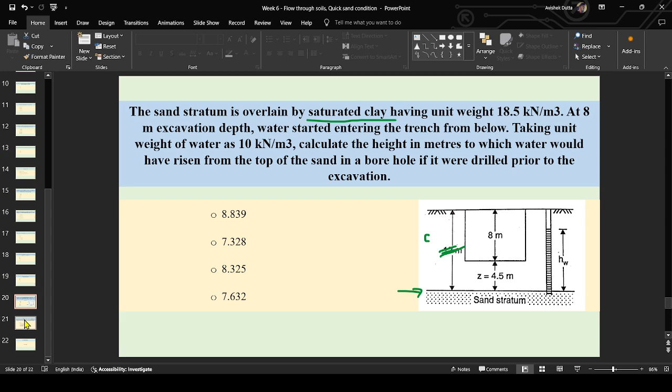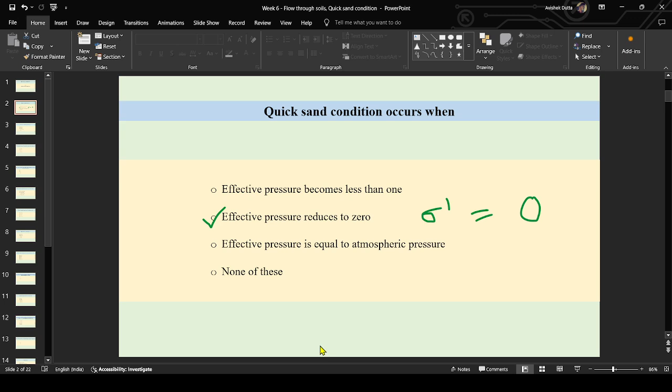Next question: soils most susceptible to piping failure are? What is the answer?

2C, yes very good, fine sands and silts. Fine sands and silts, why? Because in this kind of soil, there is a continuation of the pores through which the soil can seep upwards. What happens with clays? Clay, they are porous but not permeable, too small pores for the water to pass through.

And what happens in coarse sands and gravels? In coarse sand and gravels, because of their high grain size, there is a discontinuity in the pore spaces, and the seepage path breaks. It is not consistent, it's intermittent. But in fine sand and silts, seepage is possible because there is continuation of the pores. So fine sand and silts are more susceptible to piping failure.

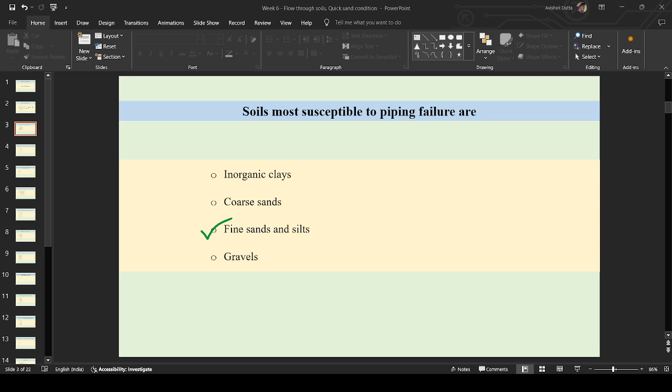Okay, the line within a dam section below which there is positive hydrostatic pressure—of course, it is an earthen dam I'm considering here. What is the answer?

What is the answer? Phreatic line. Below this, there is positive hydrostatic pressure.

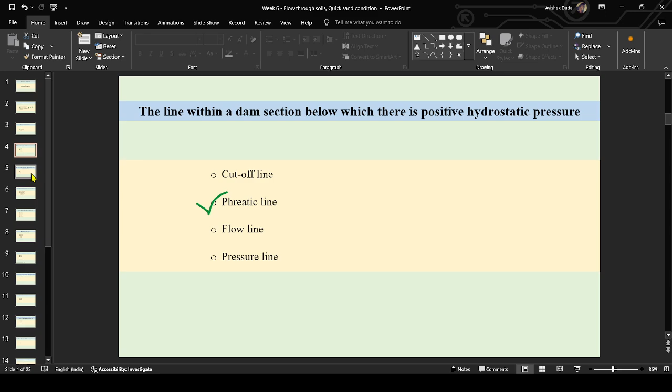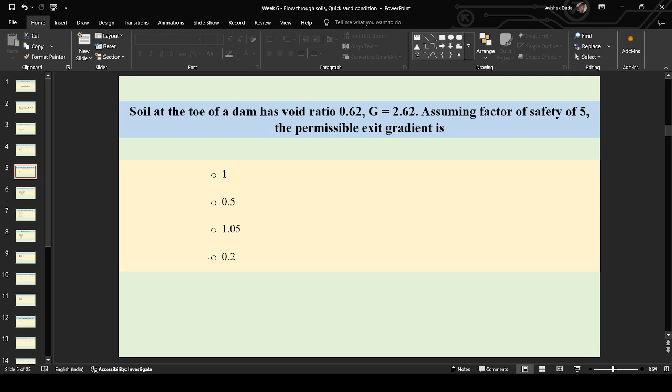Next question. Soil at the toe of a dam has void ratio 0.62, specific gravity 2.62. Assuming factor of safety of 5, the permissible exit gradient is? Have you solved this question? Anyone? Yes sir, option D, point 2. How have you solved this? Factor of safety is I critical by I exit.

Factor of safety is I critical divided by I exit. Just a moment. And factor of IC is equal to G minus 1 by 1 plus E. Yes, factor of safety equals I critical by I exit. Very good. And IC, that is the critical exit gradient, we have the formula. What is the formula? Obviously derived from the main formula of index properties that you can check in any standard textbook: G minus 1 divided by 1 plus E, isn't it?

G minus 1 divided by 1 plus E. Here G is the specific gravity, which is equal to 2.62. Numerator will give 1.62. E is void ratio 0.62. Denominator will give again 1.62. So the value of the critical hydraulic gradient will be equal to 1. So IC equals 1. So IE, that is the permissible exit gradient in this scenario for a factor of safety of 5, will be how much? IC divided by factor of safety. So 1 divided by 5, that gives us 0.2.

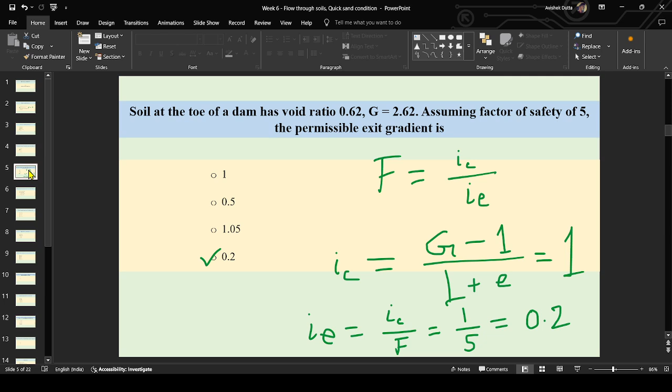The value of hydraulic gradient corresponding to zero resultant body force is? Very easy question. What is the answer? Anyone else? I believe only one person is answering, Bhagwan Singh Lodhi. Sir, the third one, critical hydraulic gradient. Okay, okay, fine.

Very good. It is critical hydraulic gradient. The value of hydraulic gradient corresponding to zero resultant body force, that kind of signifies the piping failure condition. So that hydraulic gradient is called the critical hydraulic gradient. Good. So yes, the value of hydraulic gradient corresponding to zero resultant body force is called the critical hydraulic gradient.

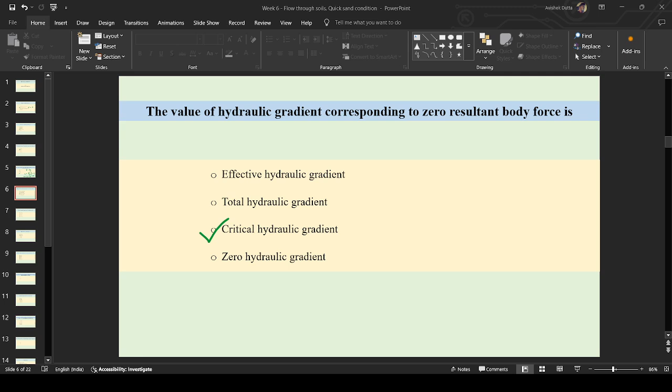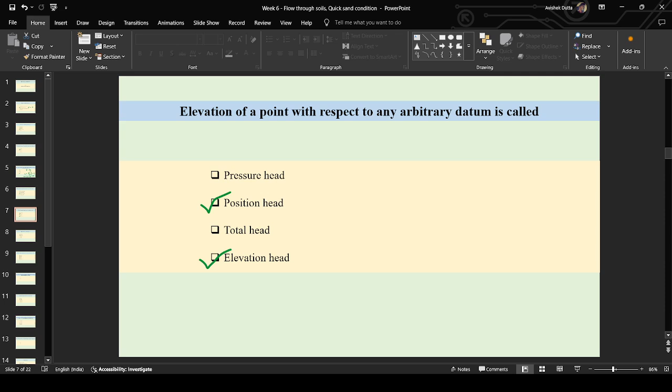Yes, very good. So by Bernoulli's principle, the total head will be constant. We know p by rho g plus v square by 2g plus h. Here h is the elevation head or position head or datum head, and that added with p by rho g, the pressure head, plus v square by 2g, the velocity head, gives us the total head. So the answer is: elevation of a point with respect to any arbitrary datum is called position head, also called elevation head. Next question.

Another simple question, very easy. Equipotential lines represent contours of equal density, equal viscosity, equal same path, or equal head? Equal head, yes, equal head, the head causing the flow. Okay. Equipotential lines represent contours of equal head.

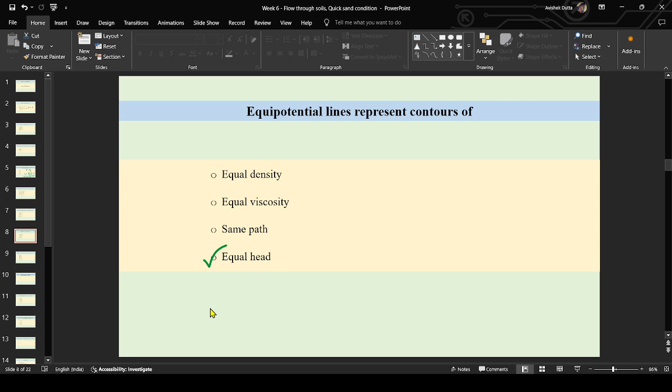Okay sir. I think in option 4, you have not mentioned which equal head. It is default - we have to understand that it is the sum of all three.

Otherwise, when we talk about equal head, generally we mean the sum of all three. If the water is flowing at datum level, h is equal to 0. Whatever the total head is, that is summed up, and the line joining the same value of total head gives us the equipotential lines. So yes, you are correct - when we say equal head, we have to assume it is the total head we are considering.

Because if it is not the total head, if I am talking only about the pressure head, the water is flowing and has a velocity. So if I talk about pressure head but the velocity is different, the total head will be different. So how can you say that it is the equipotential lines?

Here, what I am asking is: is it equal potential head, equal total head, or equal pressure head? Equipotential line means equal head. Just a moment, I'll tell you. Yes, it is equal potential head, sir - P by gamma plus Z.

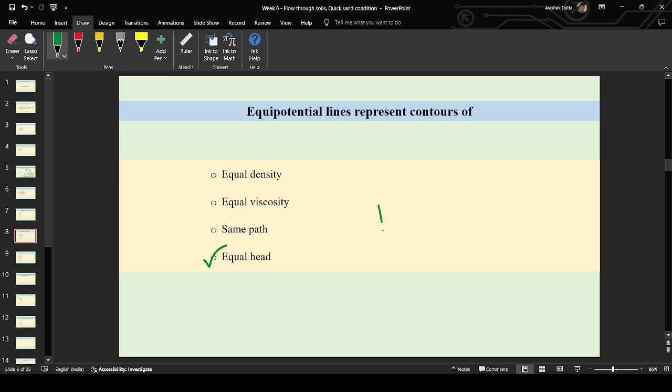Okay, you're talking about the exact value. Yes sir, yes sir. The option 4 should be equal potential head, I think. You said P by rho g plus Z. Yes sir, that is equal potential head.

In this case, when we say equipotential lines, have I mentioned velocity? No, it's not velocity, it is the Z value - datum, not velocity. Velocity head is zero in soil. Yes, I was thinking about fluid mechanics actually - in fluid mechanics it is Bernoulli's equation we have.

Okay, this is very nice of you to point out. This is equipotential - equal potential head. Equal head means equal potential head here. As you mentioned correctly, velocity head is 0, so it's P by rho g plus Z, in general conditions.

But just a moment, I have seen some conditions where velocity is being calculated. Give me a moment. No, the velocity is not always zero, I believe. Always zero sir, in soils it's negligible. Yeah, soil is negligible, but when I consider equipotential lines, I'll tell you - there is isotropic soil, there is anisotropic soil, both have different scenarios - velocity potential, stream function, seepage pressure, exit gradient, phreatic line.

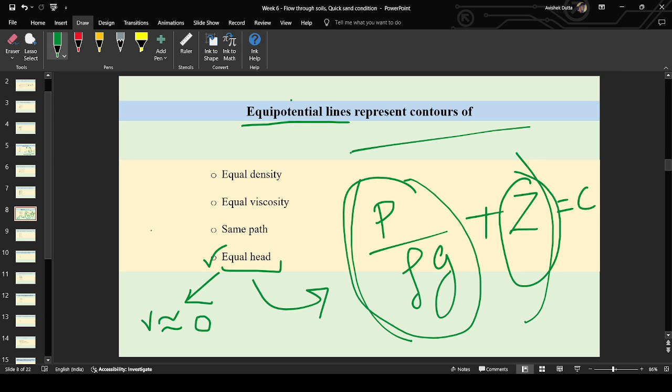The path along which individual particles of water seep through soil is called. What is the answer? Flow lines and streamlines - yes, flow lines and streamlines.

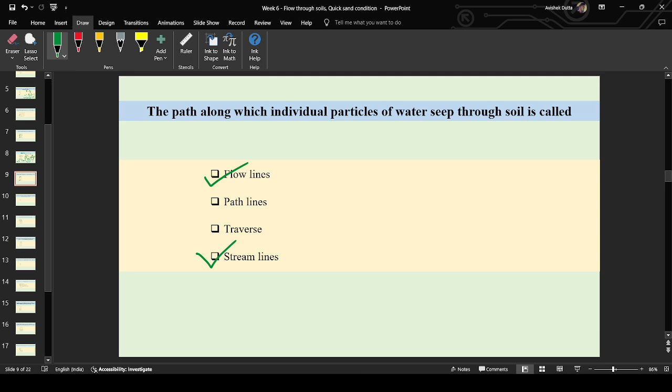Next question: Grains in the soil below hydraulic structures get lifted when the critical hydraulic gradient is greater than the exit gradient. True or false? It's true, sir, true.

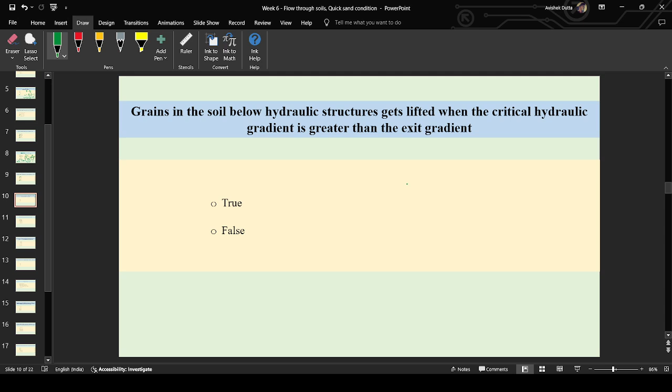Critical hydraulic gradient is more than the exit gradient - that is, the exit gradient is less than the critical hydraulic gradient. Will the soil get lifted due to piping failure? It is true only, sir.

Factor of safety is IC by I exit. Yeah, factor of safety is IC by IE here. So factor of safety in this condition is more than 1, right? So if it is more than 1, will the soil get lifted because of piping failure? No sir, when factor of safety is more than one, it cannot lift - when factor of safety is less than one, it will lift. So in this condition, critical hydraulic gradient is greater than the exit gradient, so factor of safety will be more than 1. So how can the soil get lifted due to piping failure? How can piping failure occur in the first place?

The exit gradient has to be more than the critical hydraulic gradient, isn't it? If this is otherwise, then the factor of safety will be less than 1. Factor of safety is proportional to the critical gradient. If critical gradient is more, factor of safety is more, there will be no piping failure, the soil won't get lifted up. The exit gradient is the gradient with which the soil is seeping upwards. That has to be less than the critical hydraulic gradient. If it is more, then piping failure is occurring. Could you follow? Yes sir, understood.

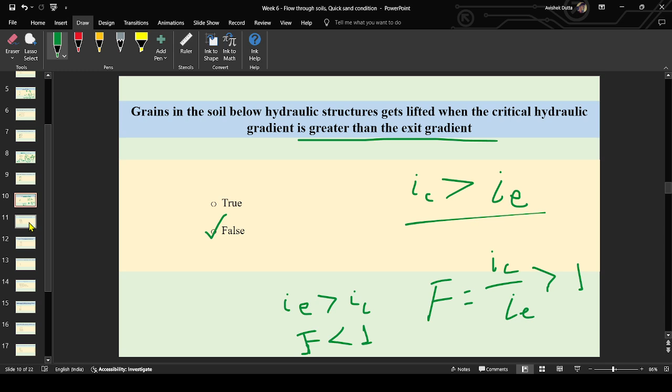So the answer of this question is, this statement is actually a false statement. Next question.

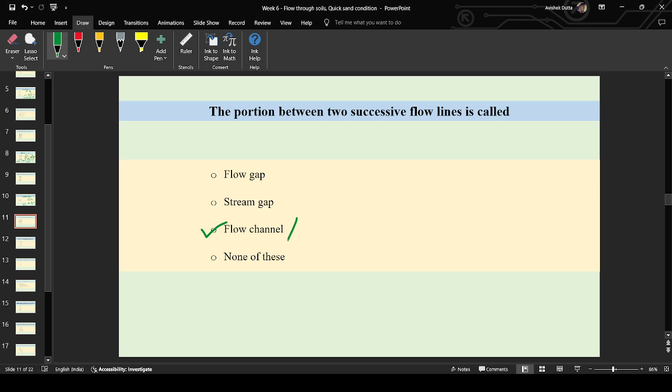The portion between two successive flow lines is called what? Flow channels, also called flow path. Very good.

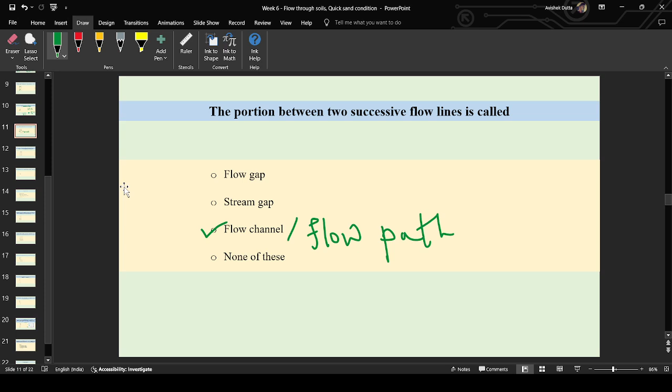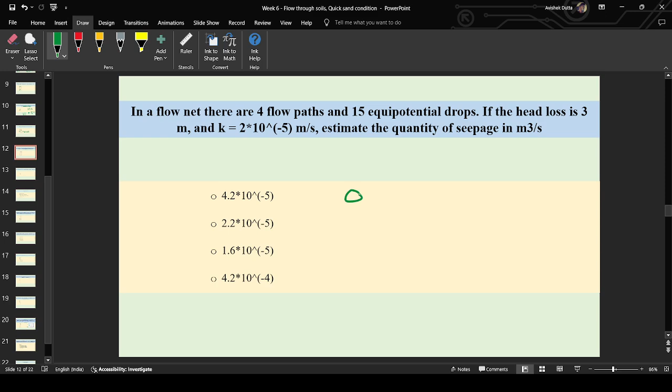Next question. In a flow net, there are 4 flow paths and 15 equipotential drops. If the head loss is 3 meters and K is 2 into 10 to the power minus 5 meters per second, estimate the quantity of seepage in meter cube per second. Have you solved it? What is the answer? C sir, I got C. Formula is Q equals K into H into NF by ND. What is NF? Number of flow paths, and ND is number of equipotential drops. So here it is equal to 4, here it is equal to 15. K I have given 2 into 10 to the power minus 5, and H is equal to 3. Putting all the values, I think you're getting C, right? 1.6 into 10 to the power minus 5 meter cube per second.

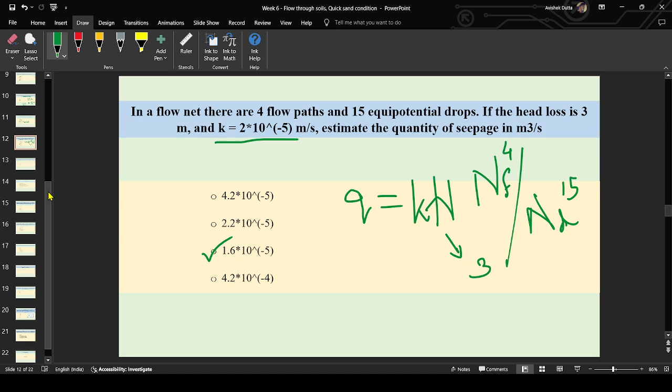Good. So the rate of discharge equals coefficient of permeability multiplied with the head multiplied by the ratio of number of flow paths to the number of equipotential drops. Next question.

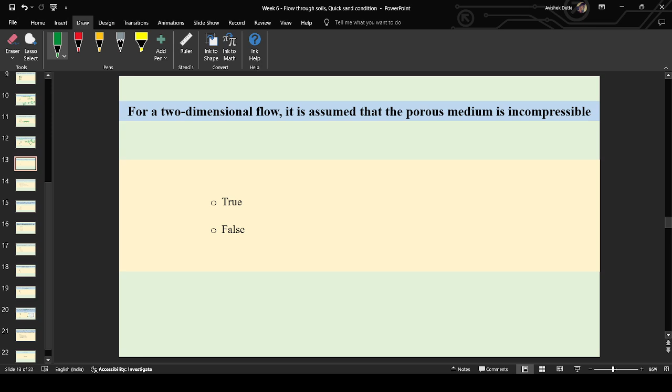For a two-dimensional flow, it is assumed that the porous medium is incompressible. Is this statement true or false? I think it is true sir. Yes, this is a basic assumption of Darcy's law, because if the porous medium is otherwise compressible, what will happen? The pore spaces will vary, the area will vary, and then we will not be able to use the Darcy's equation Q equals KIA. So yes, for a two-dimensional flow, it is assumed that the porous medium is incompressible. It is an assumption of Darcy's law. Next question.

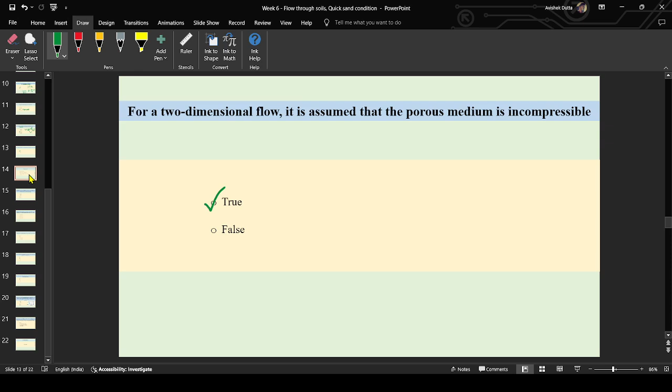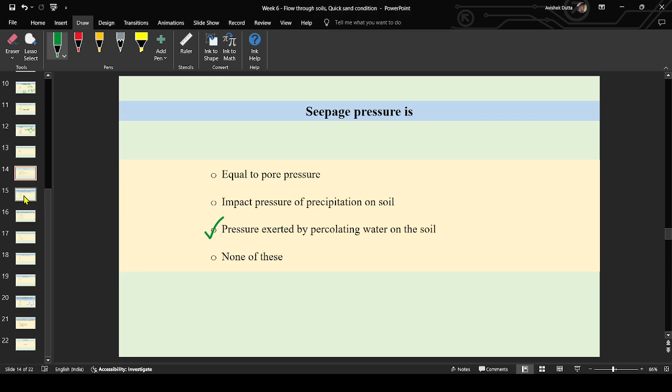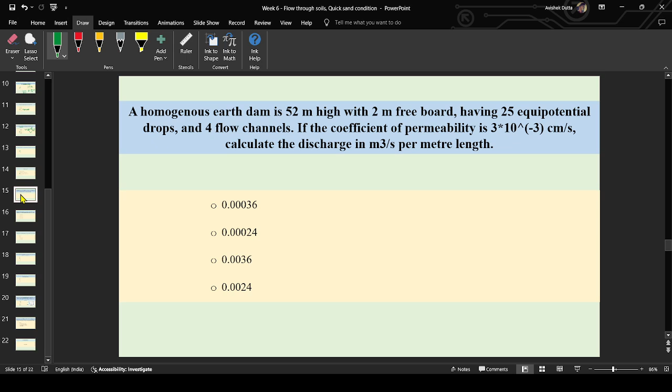A homogeneous earth dam 52 meters high with 2 meter freeboard having 25 equipotential drops and 4 flow channels. Coefficient of permeability is 3 into 10 to the power minus 3 centimeter per second. Calculate the discharge in meter cube per second. Which answer have you got? Second answer sir, B right, 0.00024.

Again we use the same formula: rate of discharge equals K H NF by ND. K is 3 into 10 to the power minus 3, H equals 50, NF equals 4, ND equals 25. Putting these values in the formula, we get 0.00024 meter cube per second per meter length.

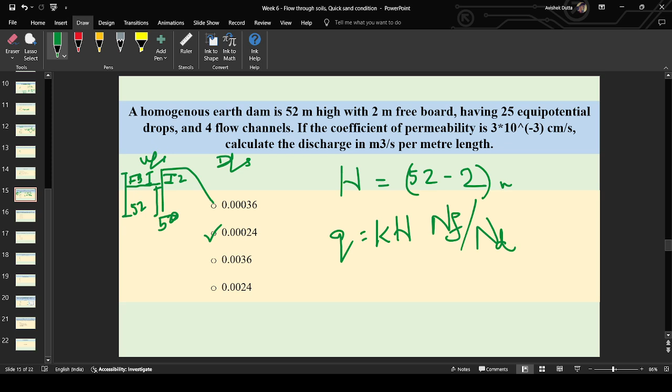Is it clear? Yes, sir. You have solved this problem, so you are saying it's clear, but the other person is not saying anything. It happens in other classes too, Bhagwan Singh. One or two people are only interactive, and others don't interact. Okay, it's fine, anyway.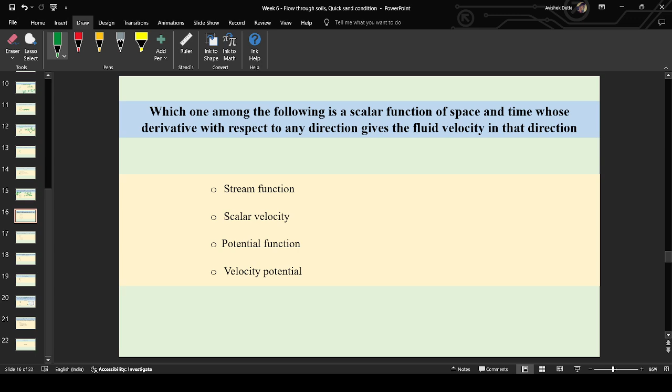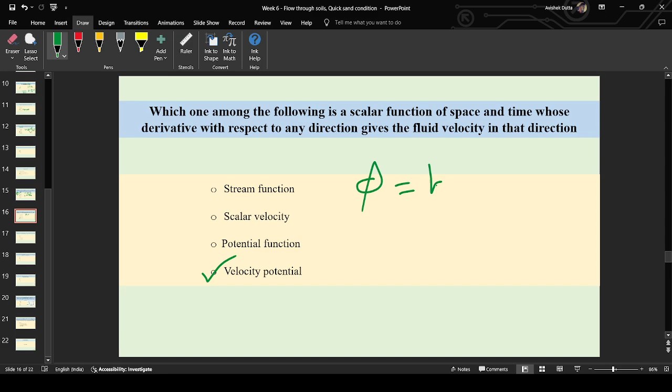Velocity potential, okay. How do we define the function? It's a scalar function, and this is the way we define it - the product of the coefficient of permeability and the head.

Okay, causing the flow. Now what I have mentioned over here is the derivative with respect to any direction. For example, if we differentiate this, and why do I write it like this? Because it is a partial derivative, obviously. It is a constant: head causing the flow divided by the thickness or length. This is what? Gradient, right? It equals velocity in the x direction, isn't it? Is this derivation clear?

Okay, sir, yes. Sir, what is the source you are following for this particular topic, sir? Not the chapter, only the present topic about velocity potential. I always follow Soil Mechanics and Foundations by BC Punmia.

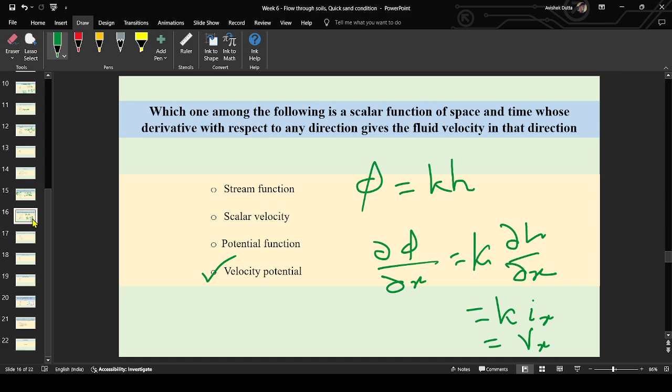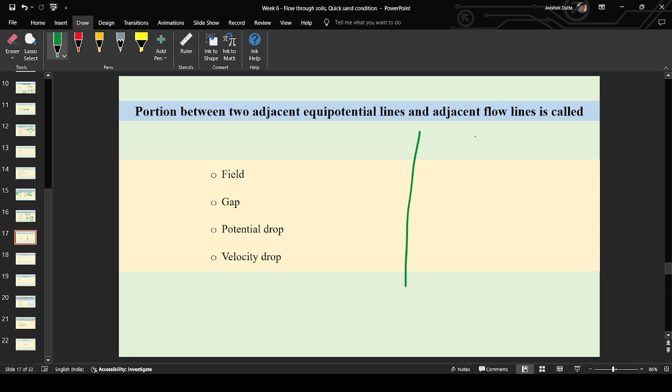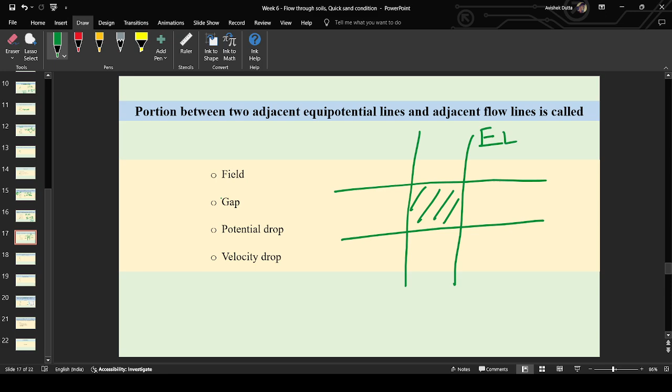Yes, the portion between two adjacent equipotential lines and adjacent flow lines is called - equipotential lines, flow lines - what is this called? Flow field. Yes, flow field or field, you can call it simply field also. This is the flow line, and what is this called? This space is called flow channel, or flow path. So yes, the portion between two adjacent equipotential lines and adjacent flow lines is called a field. Good.

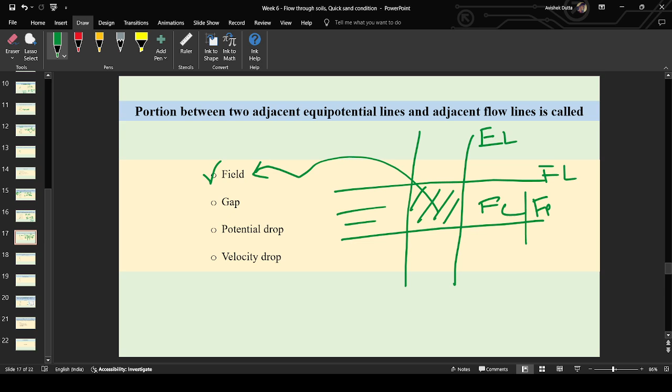Next question: hydraulic head that would produce a quick condition in a sand stratum of 2 meter thickness, if G equals 2.7, E equals 0.7. What is the answer, hydraulic head in meters? What is the answer you have got?

Close to one, sir. I don't believe that is correct. I'm talking about the hydraulic head. Sorry, it is 2 meter. Yes, it is 2 meter. How do you solve this?

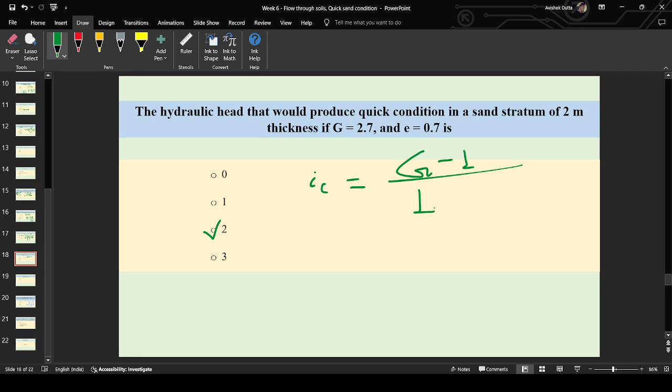You first calculate the critical hydraulic gradient, which is G minus 1 by 1 plus E. You'll get 1 again over here. And the critical hydraulic gradient equals the head causing the flow divided by the length of traverse of the flow, that is the thickness of the soil. So the head causing the flow will be equal to I-critical into L. The thickness is 2 meters, so 2 into 1 equals 2 meter. Clear, right?

For this type of questions, the answer will be in the question only, sir. I have given it this way in all the questions to make it simple, so this value will be deduced from 1 only. In this chapter, with respect to this critical hydraulic gradient, you have similar kinds of questions like in many books. I believe it is important, if you venture into the zones of velocity potential and stream function, that covers both fluid mechanics and soil mechanics, common for both.

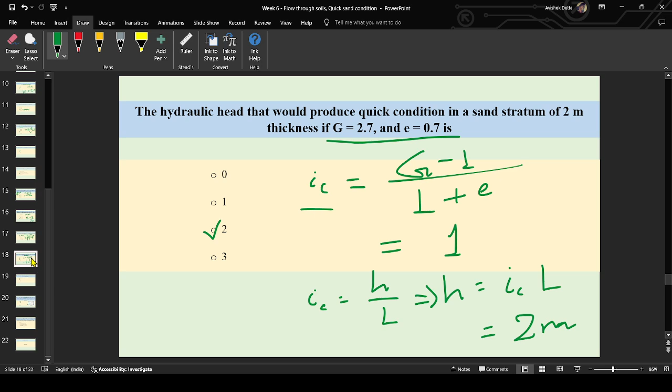Anyway, let's go to the next question. The critical hydraulic gradient for a loose deposit of sand. Again, easy question. What is the answer? Common answer.

The answer is 1. G minus 1 by 1 plus E. G is 2.67, E is 0.67.

Next question. Have you solved this? What is the answer you have got? Third answer, option C.

Option C. Why? Because here this hole was drilled prior to the excavation. So when I say that water has started entering the trench from below, and I've already mentioned previously that there was a crack, that means it is a case of piping failure, quicksand condition, right? So over here we have to consider that effective pressure equals 0 at this level of sand.

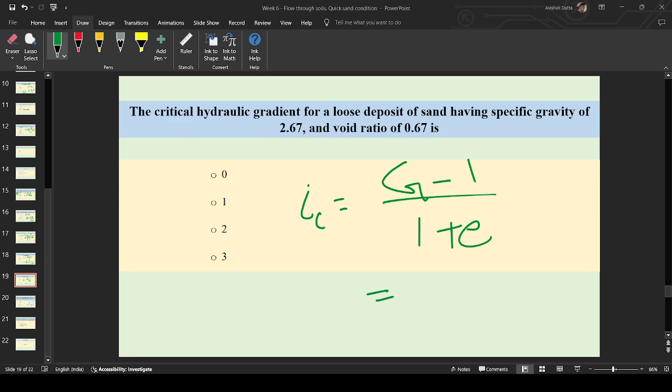Yes, so I'll just repeat this once again, since the slides stopped changing. Effective pressure equals 0, that means total stress minus the pore pressure. Here the pore pressure equals HW times gamma W, the height to which water has risen in the borehole which was drilled prior to the excavation. Solving this equation, you get the height of water HW as 8.325 meters.

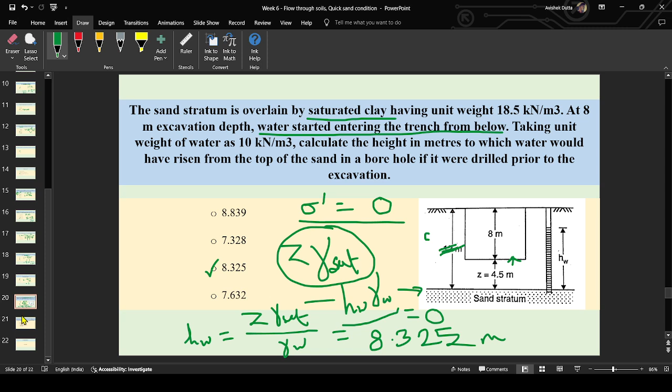Okay, so I think I'll go to the last question now. We first check whether it has. Water is flowing at a rate of 0.04 ml per second in upward direction in fine sand. Coefficient of permeability is 2 times 10 to the power minus 3 centimeter. Sample thickness is 10, cross sectional area is 45, saturated unit weight is 1.93. What is the head causing the flow?

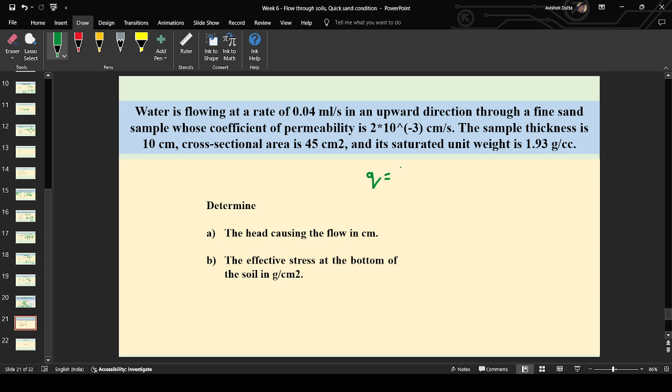What is the head causing the flow? 4.44 centimeter, very good. Q equals to KIA. So what is I? I equals to H by L. So rearranging the equation, I equals to H by L, so H equals to discharge, thickness divided by K into A. Putting all the values: what is the value of L? 10 centimeter. A is 45. Q is 0.04 and K is 2 into 10 to the power minus 3 centimeter per second. We get 4.44 centimeter is the value of H.

The next one, effective stress at the bottom of the soil. What is the answer you have got? 4.86, very good, very good, grams per centimeter square. Grams per centimeter square, yes.

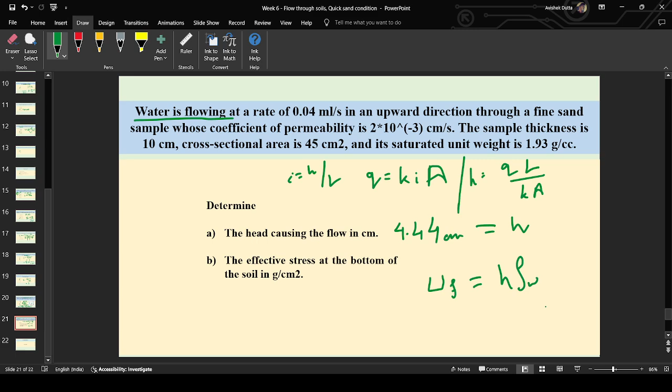Very good. So at the bottom of the soil, we have to remember that the water is flowing in an upward direction. So in this case, for finding out the effective stress, what do we do? We subtract total pressure minus the pore pressure. But since water is flowing in an upward direction, the water has a different head, that head over here is H. So the upward force will be the head causing the flow multiplied by the unit weight, or I'll just simply write density, because I'm showing it in gram per cc. Upward force equals the head causing the flow multiplied by the density of water.

What is the downward force over here? Downward force is the thickness of the soil, obviously, times the submerged density. This submerged density - why? Water is flowing upward, it is not contributing to total stress. Water flowing upward, not contributing to total stress. So for effective stress, the downward force will be the submerged unit weight multiplied by the thickness of the soil.

Now what is rho dash, the submerged unit weight? 0.93. Yes, 1.93 minus 1 is 0.93 gram per cc, obviously.

So over here, the effective stress, that is sigma, at the bottom of the soil layer will be equal to the downward force minus the upward force, isn't it? Yes, sir. So you subtract: downward force is 0.93 into thickness is 10 centimeter, so 9.3 minus 4.44, we get 4.86.

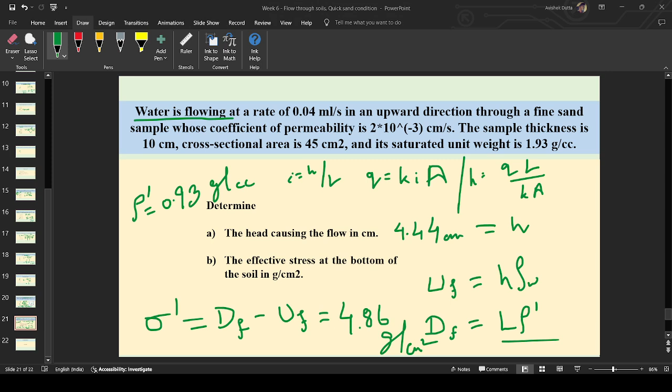No sir. Okay, fine, fine. So I believe - just a moment, I'll switch to the - yes, I believe the session gave you some insights into the concept of seepage, isn't it? Yes sir, yes sir. Okay, fine.

Sir, a small clarity required, sir. Yes, small clarity for what? I don't know why this chapter was selected right now, because do you have to follow the sequence of the faculty? Yes, professor, yes. But the chapter was not covered, no sir. I don't know, that is why I'm intimating you. Let me check, I'll just switch to the - right now compaction is over. Just a moment, just a moment. Yes sir, yes sir. Someone is joining now. Oh my God.

As I can see, the class had asked a question about the session following the syllabus. This should be the sixth discussion session. Let me check the syllabus, just a moment.

Week 6 was compaction, sir. Wait, I'm checking this syllabus. This is geotechnical engineering one, right? Yes, sir. So I can see that week 4 was soil compaction, which is already over.

Week 5 was soil water statics, and week 6 is flow through soils and quicksand condition. Week 7 is permeability. No, as per the professor, what he is covering - the professor's name I think is Devendra Narain Singh, right? Yes, sir.

Okay, week 6 was compaction as per him. I have already downloaded the syllabus, but I'll check again in Google, the current syllabus on the website. Just a moment, give me a moment.

I am going as per the syllabus. But professor was maybe not following the syllabus, and then week 6 was compaction as per him. I'm not intimated about how the professor is going, because I'm not interacting - the scholars don't interact with the professors. So I think that might be an issue, but anyway, just give me a moment.

In the initial 1 or 2 classes, there are like 10 or 12 students who join. But after that, it reduces to 2 or 3 because they already know that they are going to get the YouTube materials and all those things. So the attendance decreases. So anyway, I think people will see the YouTube videos.

They can see it later also, after they cover the chapter. In that case, after it is covered by the professor, it's okay.

You have not covered still now soil compaction, sir. Yeah, I've covered soil compaction. Compaction is over. Then what is missing from your side? As if you go as per the syllabus given in the NPTEL website, you are following as per that. Yes, till chapter 6, I have followed.

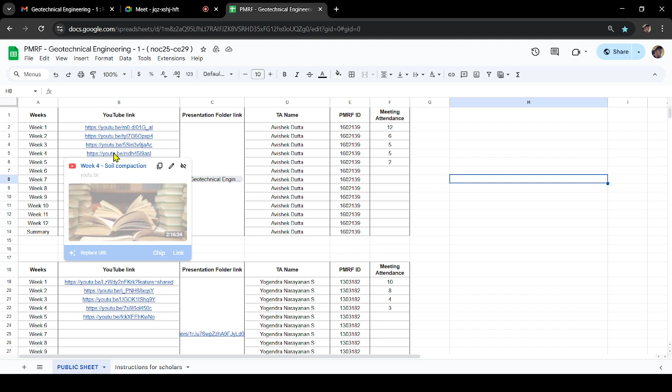Okay, just a moment, I'll tell you because I've already uploaded the videos. So week one, I believe it was the origin of soils, right? Yes, sir, week one, origin of soils, and then it was the basic relationships in soil properties, that chapter. Then it was soil structure, soil classification - week 3. Week 4 was soil compaction, and then week 5 was soil water statics, that is the effective pressure chapter.

You are following exactly, yes, yes, yes. So that is what I follow, and what will be done as per the scenario in this session - week 7, whatever is given in the syllabus, that will be done in the coming Friday session also.